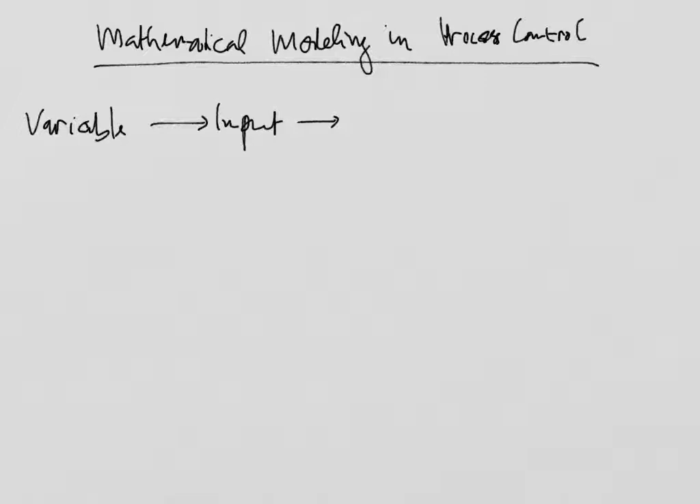Before we discuss about mathematical modeling, we review what we have studied about the variable. We have the classification of variable: input variable and output variable. In input variable, we have two types of input variable, that's the load variable and the manipulated variable. It is our input variable here.

And then in output variable we have measured variable and unmeasured variable. Okay, we have studied this in our lecture before, and then I will illustrate you another classification of variable, or another variable that we call the state variable.

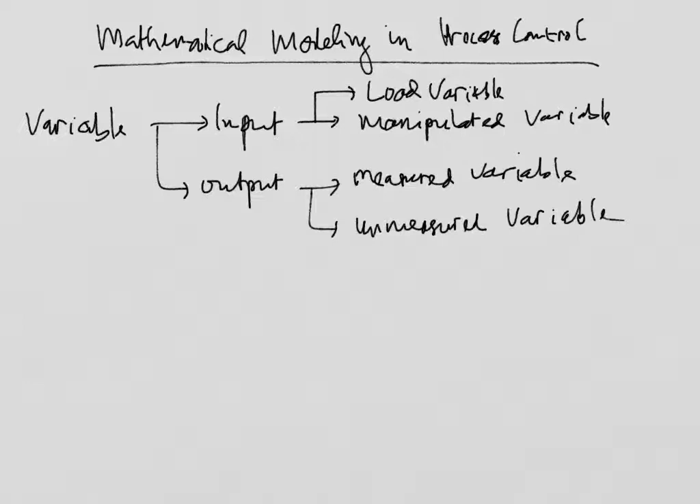What is the state variable? How do we know about the state variable? The variable that we can state or we can measure is temperature, pressure, composition, and then the flow rate, maybe.

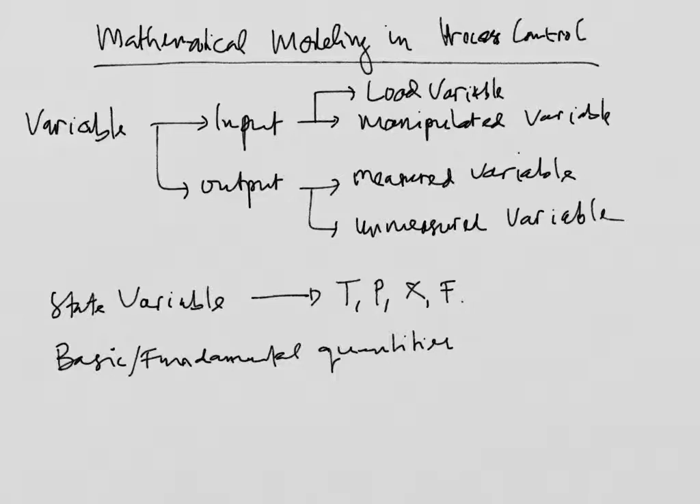In this time, we have the basic or fundamental quantities. What is the basic or fundamental quantities in chemical engineering? Do you know about the mass and the energy and the momentum? That is the basic or fundamental quantities.

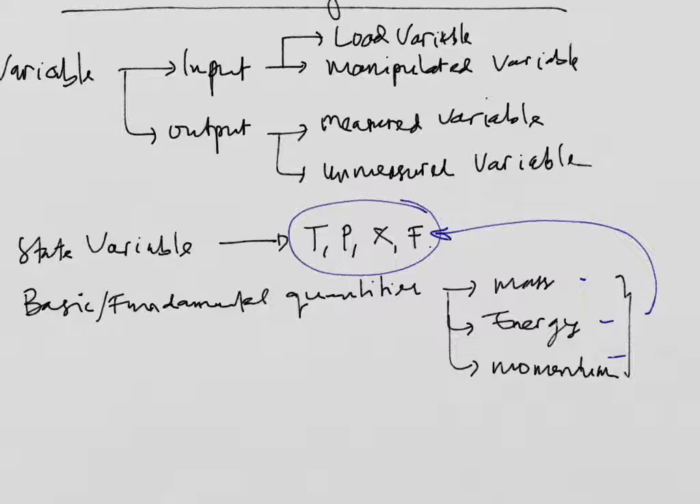But unfortunately, these quantities we cannot measure directly. We cannot measure mass, energy, and momentum directly, but we can measure temperature, pressure, composition, and the flow rate. That is the state variable. In the process, we have the state variable to state the process, the condition of the process, to show the condition of the process. Okay, that is the state variable.

Okay, we know here that the state variable, that is T (temperature), pressure, X, and flow rate, it can form the differential term or the accumulation term. It can be in accumulation term. That is the state variable.

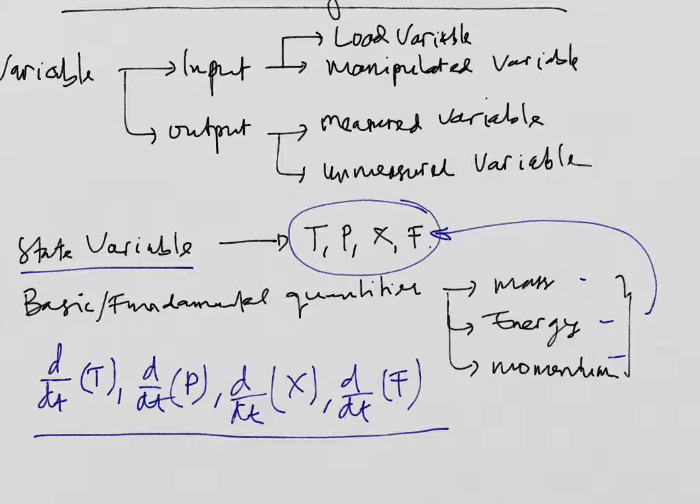Beside the state variable, we have the state equation. We build this state equation using the conservation law. It can be conservation of mass, conservation of energy, and then conservation of momentum.

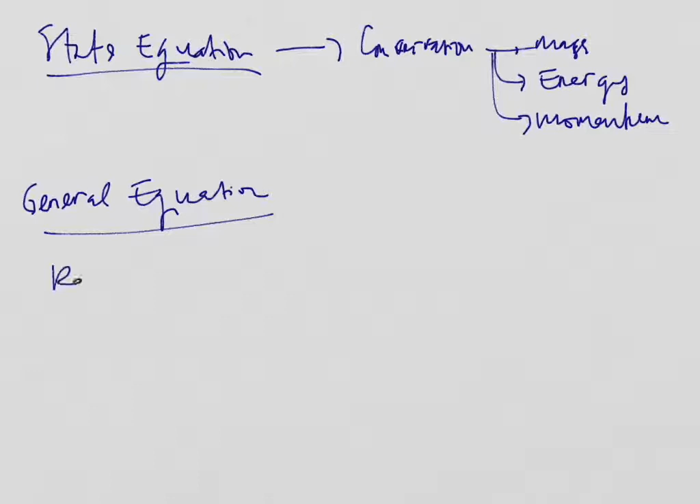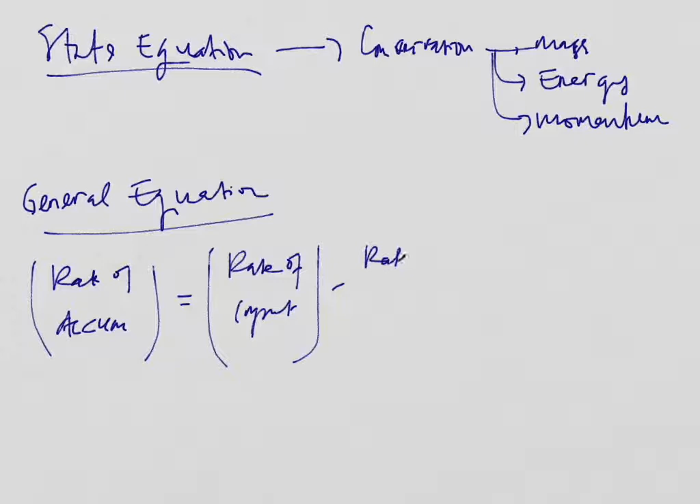And now we start modeling. We come from the general equation. The general equation is: rate of accumulation equal to rate of input. That is the general formula. Rate of output plus rate of generation.

Okay. We apply this equation to the three conservation laws here: rate of accumulation of mass, rate of input of mass, rate of output of mass, and rate of generation of mass. Rate of input, rate of accumulation of energy, and then similar for energy and momentum. Okay, that is the formula.

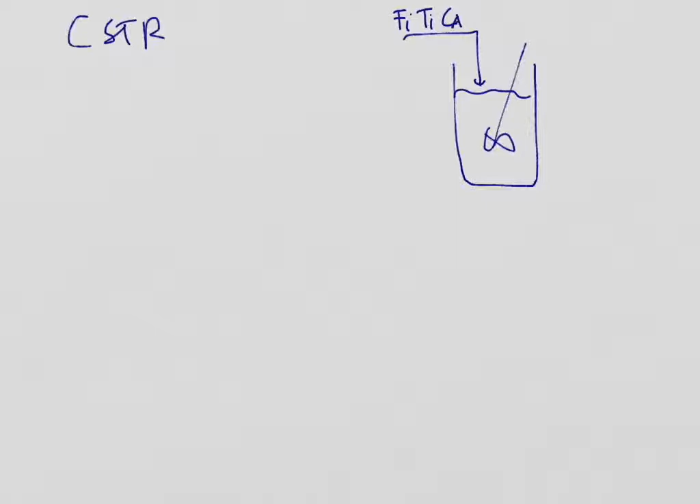And then we start using an example of the CSTR. Do you know CSTR? Continuous stirred tank reactor. We have the reactor here, that is the tank. Then start, and this is the input. We have the flow rate of input Fi, and then Ti, and then Cai. That is the input.

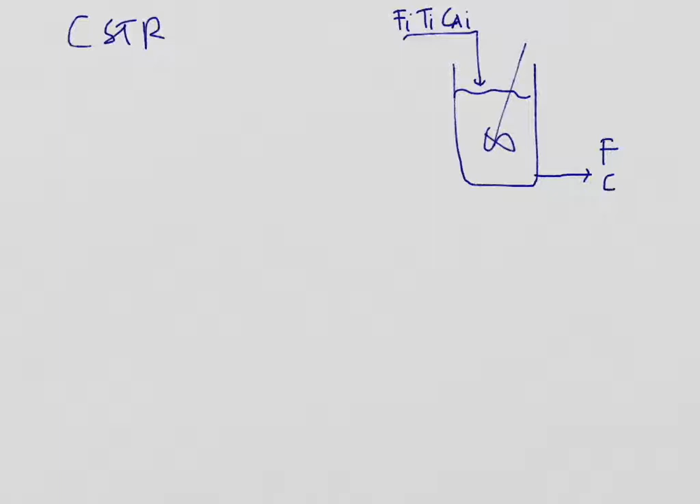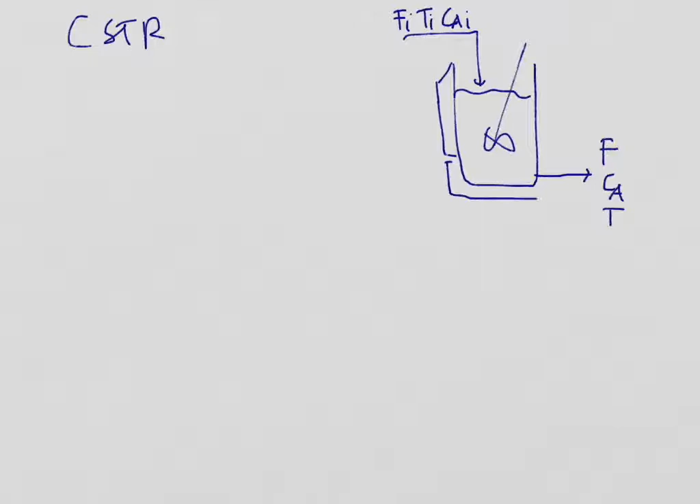And then we have the output here. The flow rate is F, and the composition is Ca, and the temperature is T. And then we have the jacket here for the coolant, like this. This is the coolant in, F coolant, temperature coolant in, and then the coolant out, the temperature of coolant out is Tco.

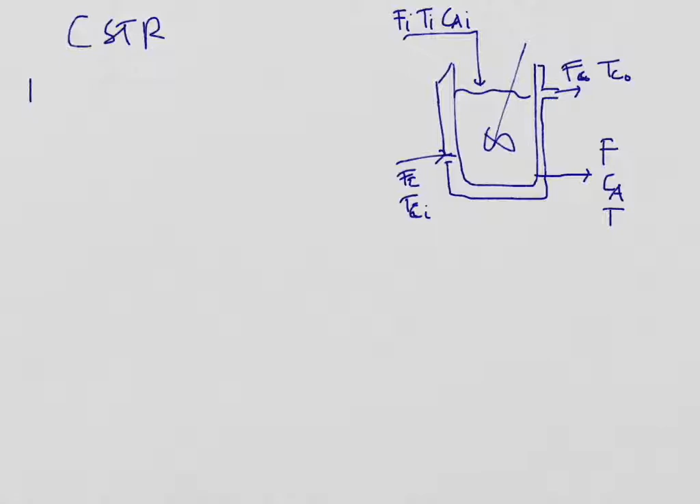Okay, you have here that is our system. And then we start to identify the unit of the system. We have F, and then Fi, and then F coolant. The unit of this quantity is volumetric per unit time, volumetric per unit time, volumetric per unit time. And we have the concentration Ca and Ca input. The unit of this quantity is mole per volume. Okay.

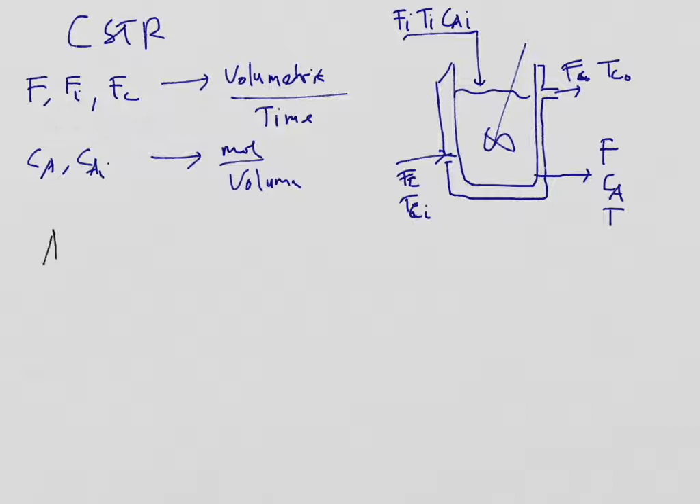And then we make an assumption. We have an assumption here. Firstly, our assumption is mixing, perfect mixing.

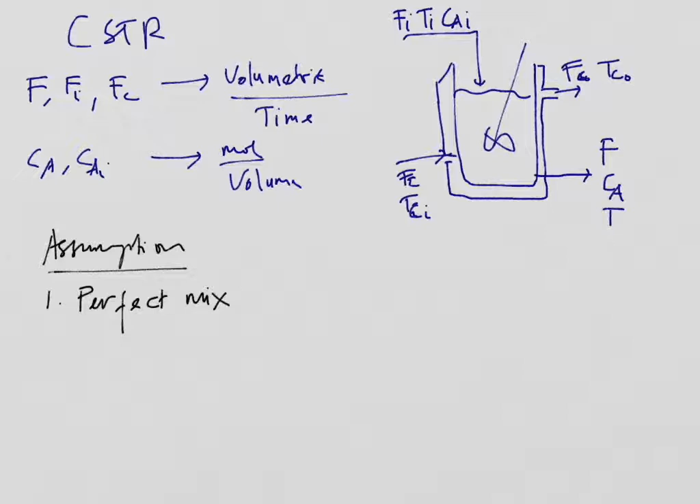What is the implementation of this assumption? Because we have this assumption, the temperature in the reactor is exactly the same as the temperature output from the reactor. So the temperature in the reactor is T, and the concentration in the reactor is Ca.

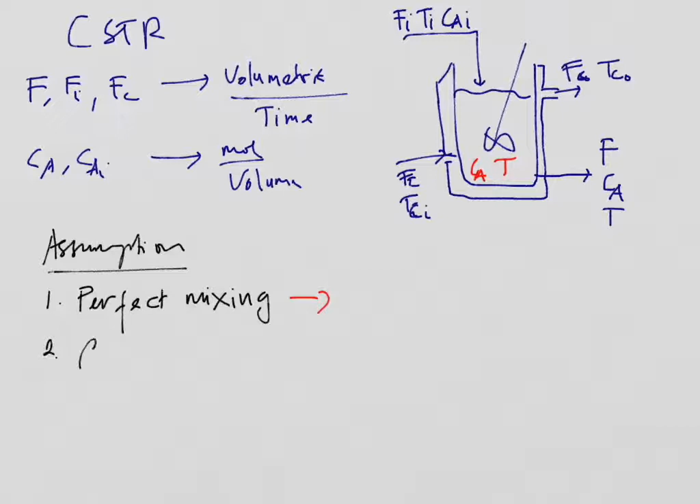Because we assume that the mixing is perfect, okay? We have another assumption, that the rho and the Cp are constant. We assume the rho and Cp are not a function of temperature. This is constant.

And we have another assumption too, that the reaction of A into P is a first order reaction, and exothermic. Okay, that is our assumption.

And we add the assumption again that the insulation is perfect. So there is no heat loss. We assume there is no heat loss. Okay, that is our assumption for this system.

Okay, then we start the analysis. We start from overall mass balance.

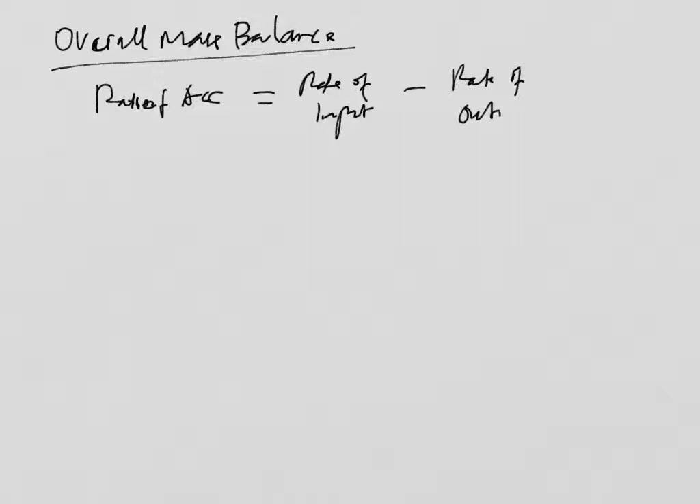We have here the rate of accumulation equal to rate of input minus rate of output. Okay, there is no generation in mass, because of the conservation of mass, there is no generation. Mass cannot be generated and cannot disappear.

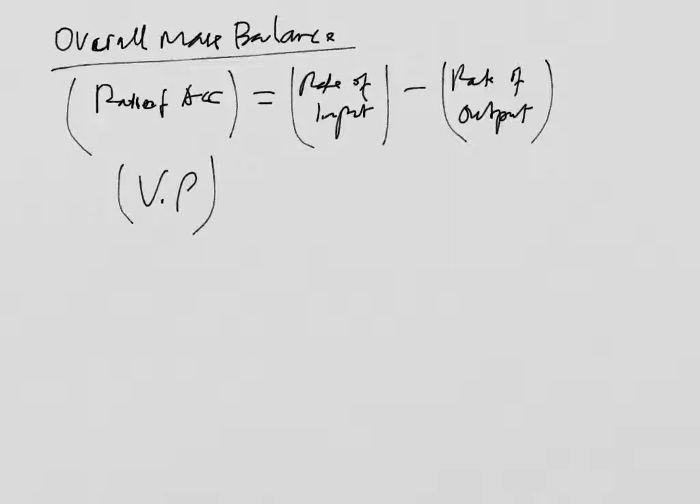So we have here the representation of mass, volume multiplied by rho, that is the mass, and the accumulation is the term of d/dt, that's equal to Fi, the input, multiplied by rho, and then F multiplied by rho. You can see this, that is the input, that is the output.

Because rho is constant, we can construct rho dV/dt equal to Fi rho minus F rho. And we can remove the rho, so we have the final equation dV/dt equal to Fi minus F. That is our first equation. From overall mass balance, we get dV/dt equal to Fi minus F.

Okay, and then we continue to the component mass balance. In component mass balance, for component A, for the mass balance of component A, here.

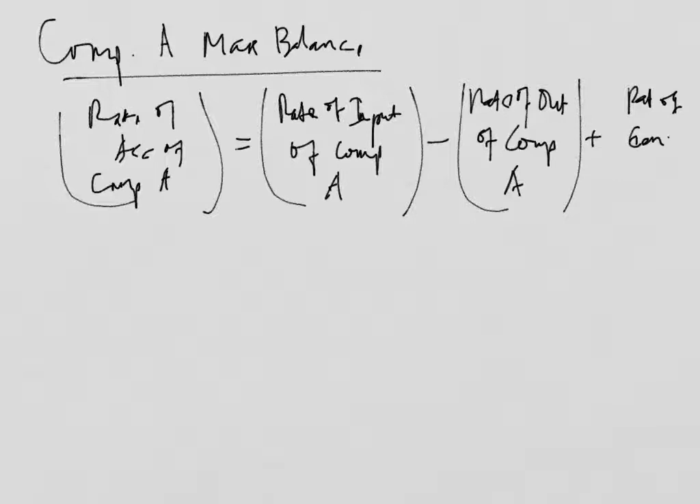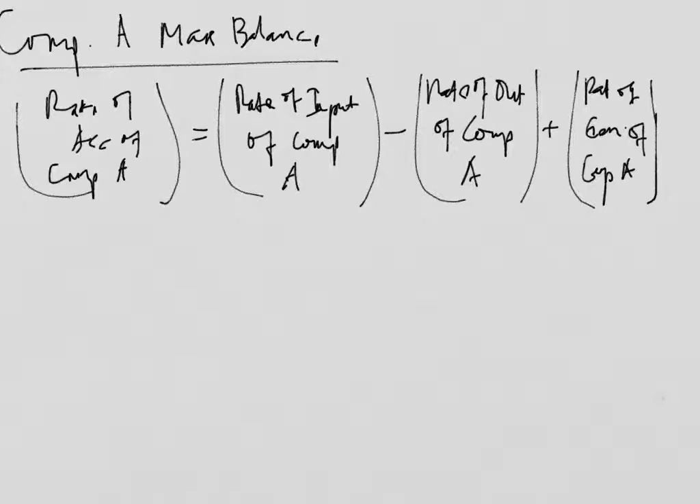We use the same formula: rate of accumulation of component A equal to rate of input of component A minus rate of output of component A plus rate of generation of component A. In terms of the component, we have generation and loss because the mass of the component is converted into another component, but not disappearing or being generated.

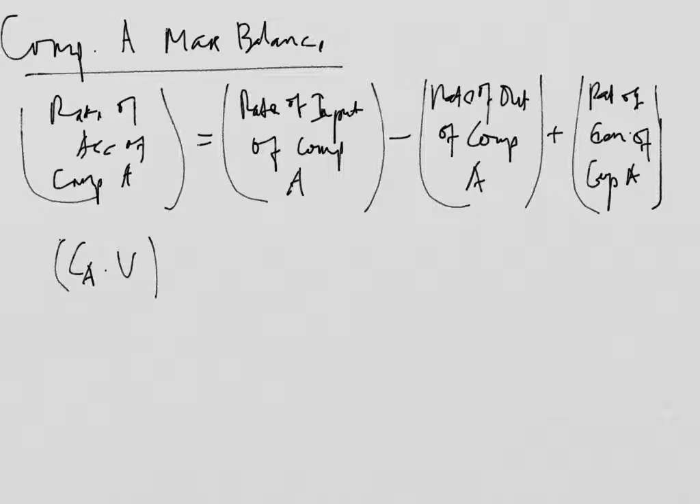Okay, in accumulation, we have the concentration Ca multiplied by the volume of the reactor here. The accumulation is the concentration in the reactor multiplied by the volume of the reactor. That is the mass, the accumulation V dCa/dt equal to the input Fi multiplied by Ca input, and the output is F multiplied by Ca, and the generation is the reaction, minus Ra multiplied by the volume of the reactor.

Focus on this formula. Ca and V change over time, so there is no constant here. So from this formula we can use the fundamental mathematical equation, Ca dV/dt plus V dCa/dt equal to...

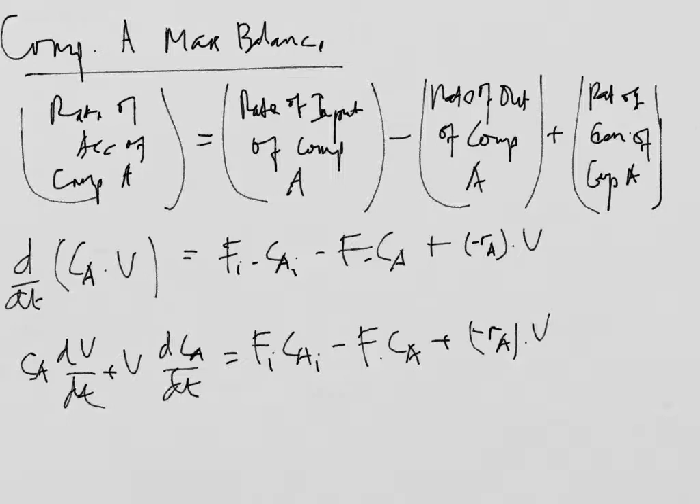Fi Cai minus F Ca plus minus Ra multiplied by V, the volume of the reactor. And you can see this dV/dt, and we have the formula for dV/dt in equation 1. So we can substitute this formula using equation 1.

So we have Ca multiplied by (Fi minus F), that is formula 1, plus V dCa/dt, equal to Fi Cai minus F Ca plus minus Ra multiplied by V, the volume of the reactor. Here we have Fi Ca minus F Ca plus V dCa/dt equal to Fi Cai minus F Ca plus minus Ra, and then the volume of the reactor.

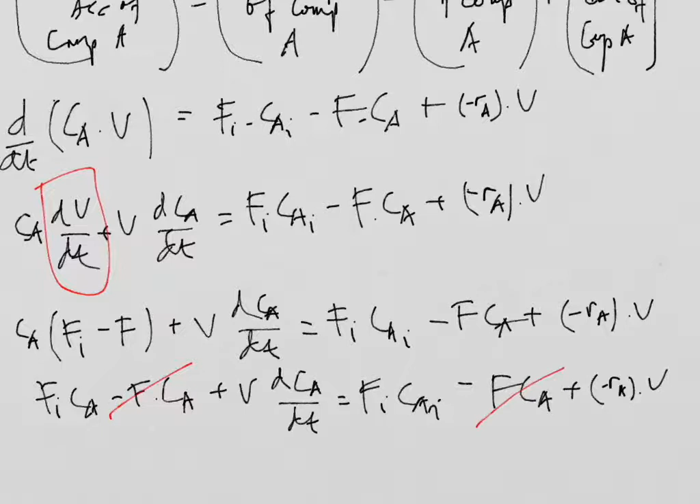We have here that F Ca, we can remove the F Ca, and then we can reorganize our formula so that V dCa/dt equal to Fi Cai minus Fi Ca plus minus Ra, the formula, multiplied by V, the volume of the reactor, and then we can reorganize again.

dCa/dt equal to Fi divided by V multiplied by (Cai minus Ca) plus minus Ra. Okay, we divide here using V. That is the second equation, the equation for dCa/dt, the second equation. Okay, clear enough?

That's good. We continue to the...

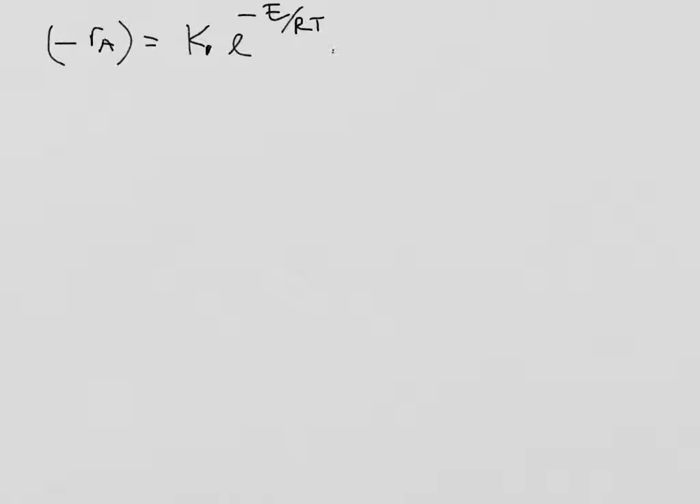We have here the CA, we have the equation of CA. The equation of CA, we can use the Arrhenius equation, that minus RA equals K0 multiplied by exponent minus activation energy, divided by R and T, and then multiplied by the concentration, I think. That is the 2.A equation, you can say this. Okay, that is the addition equation for equation 2.

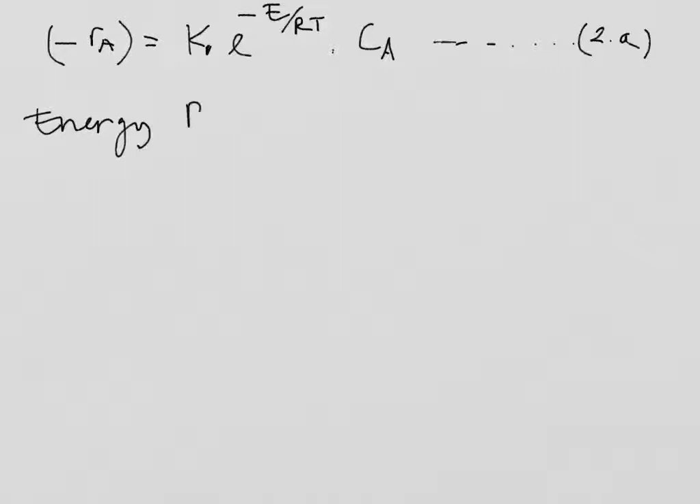Okay, and then we continue to energy balance. The energy balance. We use the same formula.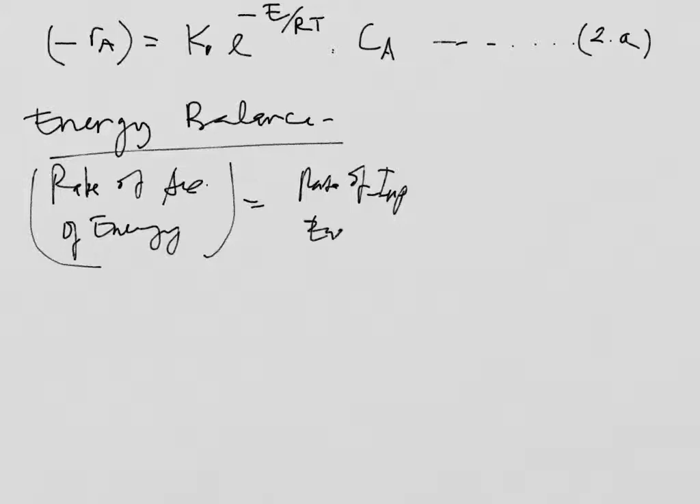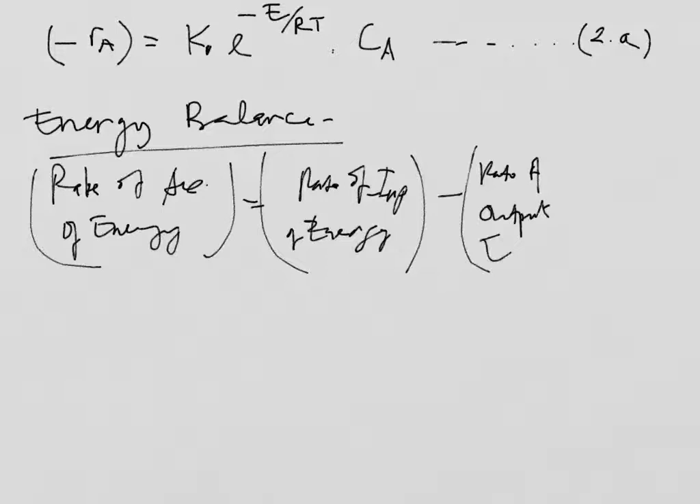The rate of accumulation of energy equal to rate of input energy minus rate of output energy, and then minus the energy or heat that is removed by the coolant, heat or energy. We call this energy or heat removed by coolant, and then plus the energy that is generated by the reaction, from exothermic reaction. Okay, that is the formula of energy balance.

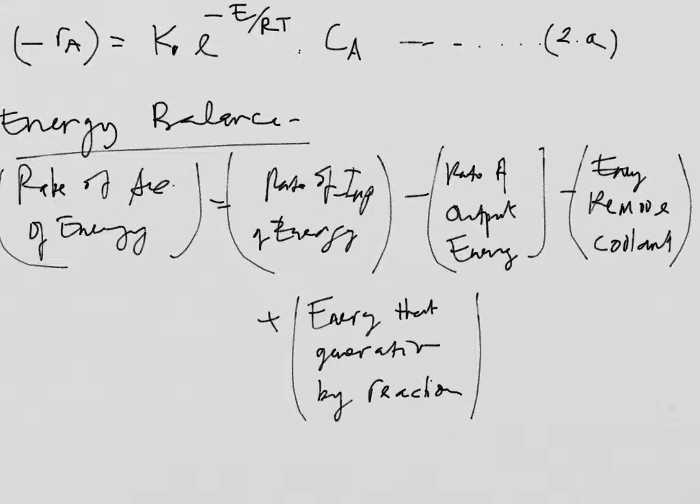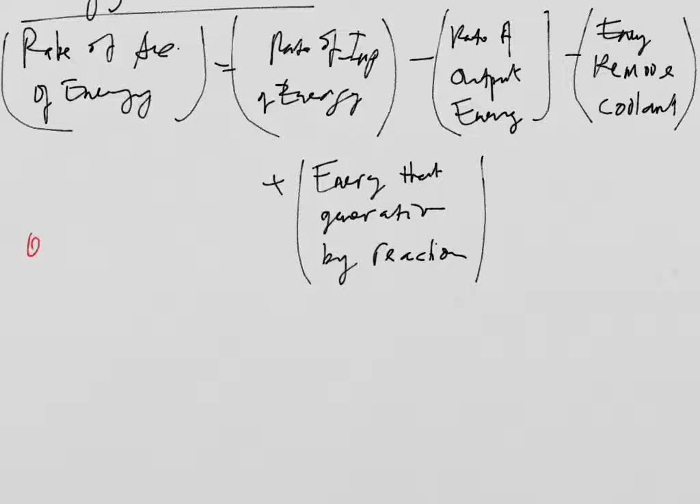And then from this we explain part into part. Rate of accumulation, we have the rate of accumulation. Okay, that is our formula. The energy or the heat is mCpT. We have this, so M is rho multiplied by volume. We can say that in the reactor we have the volume, so we multiply by rho, and then we calculate and multiply by Cp, and then the temperature in the reactor.

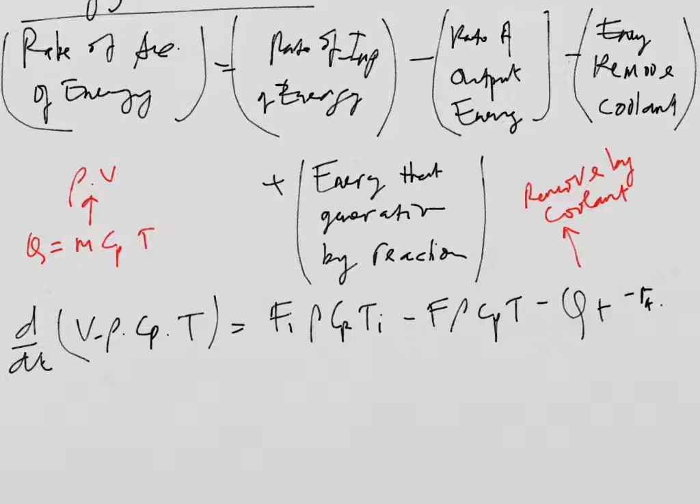That is the heat energy of the fluid from the fluid in the reactor. So the accumulation term here equals Fi rho Cp Ti minus F rho Cp T minus the Q, that is the energy removed by coolant, and then plus minus RA multiplied by delta H, and then multiplied by the volume of the reactor. Okay, that is our formula here.

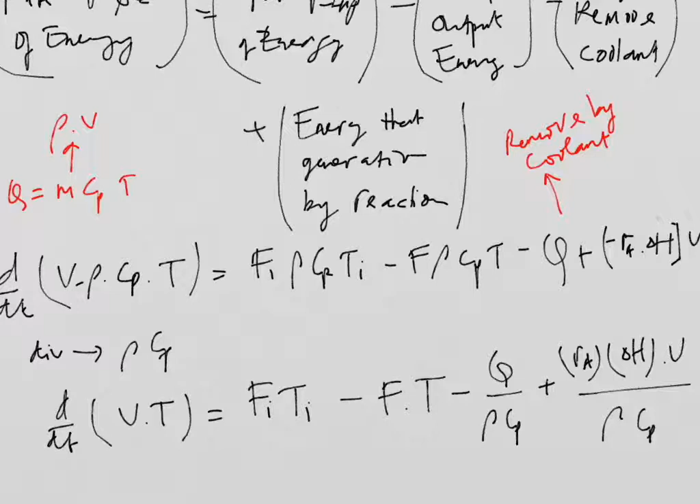We can simplify this formula by division by rho Cp. So we have d/dt of V*T equal to Fi multiplied by Ti minus F multiplied by T, minus Q divided by rho Cp, and then plus RA and delta H and volume, then divided by rho Cp. Okay, we divide this formula using rho Cp.

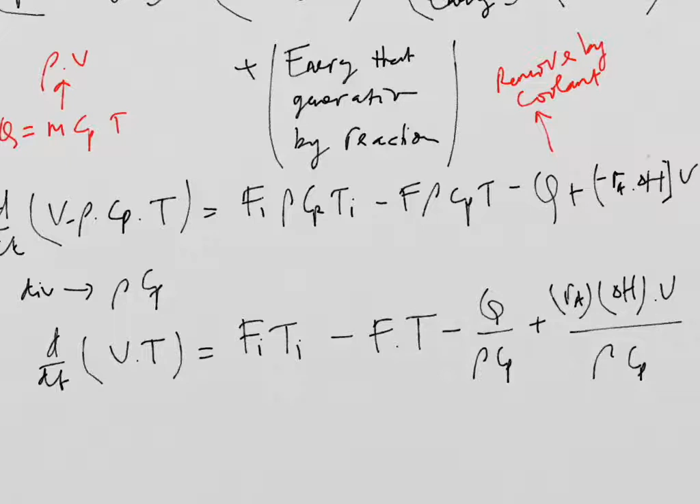We know this, the V and the temperature are functions of time, so we can explain here that V dT/dt plus T dV/dt, that equals Fi Ti minus F T minus Q per rho Cp, then plus RA delta H, volume, and rho Cp. Okay, that is our formula.

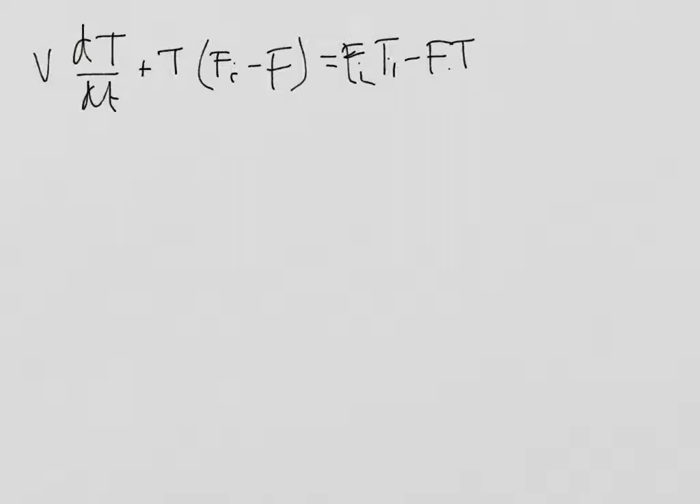And then you know this, the dV/dt from equation 1, we can replace this by Fi minus F. So we have the formula here that V dT/dt plus T(Fi minus F) equal to Fi Ti minus F T minus Q per rho Cp plus RA delta H on volume, and then rho Cp.

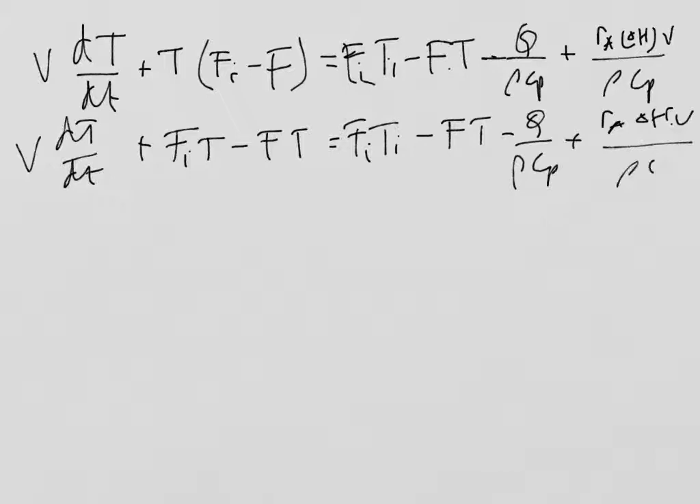Okay, you can see this, that we have Fi T minus F T equal to V dT/dt equals Fi Ti minus F T minus Q per rho Cp, and then plus RA delta H and volume, but the rho Cp. We can remove this formula and reorganize into the right side, and then we get the new formula of V dT/dt equal to Fi Ti minus F T minus Fi T, and then minus Q per rho Cp, and then plus RA delta H, and then the volume, and then rho Cp.

Okay, and we can divide by V. So we get dT/dt equal to Fi per V, Ti minus T, and then minus Q per rho Cp V, then plus RA delta H, and then the volume per rho Cp V. So we can remove the V here.

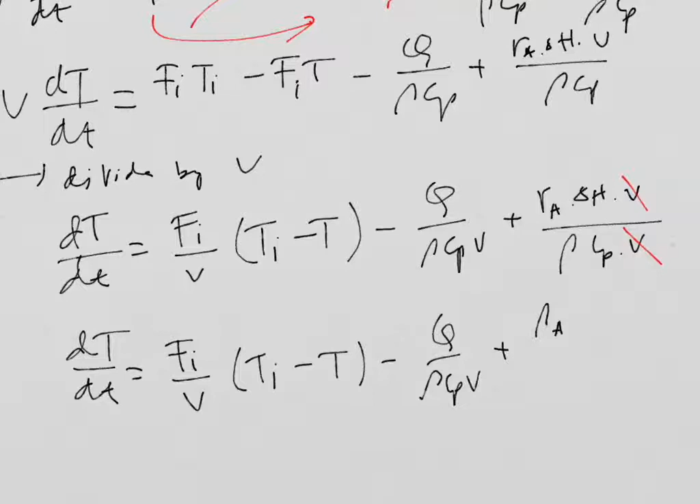So we got the final formula, that is dT, the differential of temperature, is Fi per V, Ti minus T, minus Q per rho Cp V, then plus RA, the reaction, and then delta H, and then rho Cp. Okay, that is formula 3. We got this, formula 3 here.

Okay, so we have dV/dt, dCA/dt, and dT/dt. Formula 1 is dV/dt, and then dCA/dt, and then dT/dt. Okay, we got this.

Do you know about the Q? Q is equal to, this is the addition equation, Q is F coolant multiplied by rho, and then Cp, and then multiplied by the temperature coolant output minus temperature coolant input, or delta T.

That is the Q removed by coolant. So this is formula 5. You can see this, formula 5. Okay, we resume our formula.

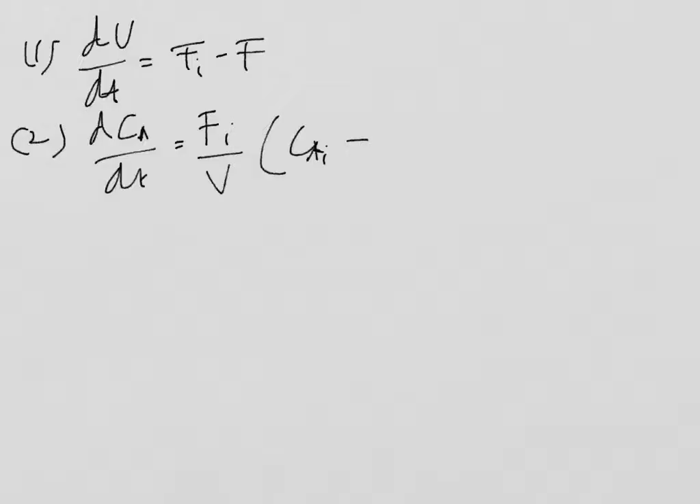Firstly we have dV/dt equal to Fi minus F. Then the second, we get dCA/dt equal to Fi per V, Ca i minus Ca output, plus reaction, plus or minus Ra on the reaction.

And then formula 3 is the differential of the temperature. The differential of temperature is Fi per V, Ti minus T, minus Q per rho Cp V, plus Ra reaction, and then delta H of the reaction, and then rho Cp.

And the additional formula, number 4, is that Ra is Ko, Ca, and exponential minus E over RT.

And then formula 5, the Q is equal to F coolant multiplied by rho multiplied by Cp of the coolant, multiplied by the temperature difference of the coolant output minus the coolant input. So we got this formula 5.

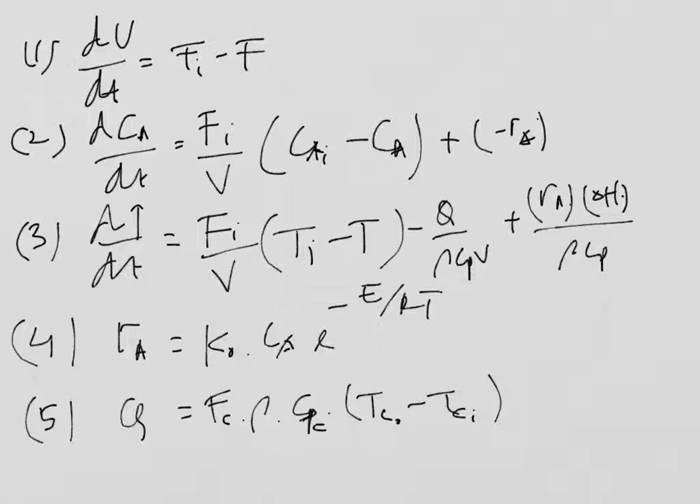And we want to identify the variables. What is the input variable? Where is the input? We get Ci, Cai, and Ti, and Fi.

And then what is the Q? We can see the Q, but we don't detail the Q, so we just call this Q as a formula. And then the F can be output variable or input variable when we use it as the manipulated variable, as we have discussed in our lecture before.

So we have the output here. What is the output that we have? The output variable is the volume of the liquid in the reactor, the Ca, and the temperature output of the reactor.

We identified the control variable and the manipulated variable. What is the control variable? It must be the output variable. It can be the volume and the temperature. Volume of the liquid in the reactor - what parameter refers to this variable? Volume refers to Fi or F.

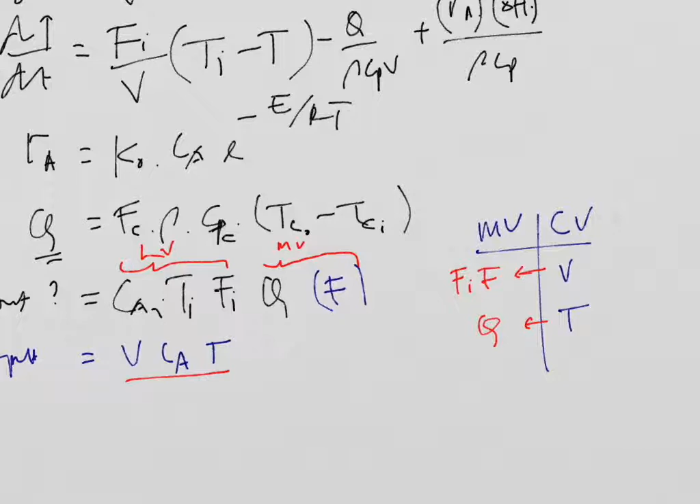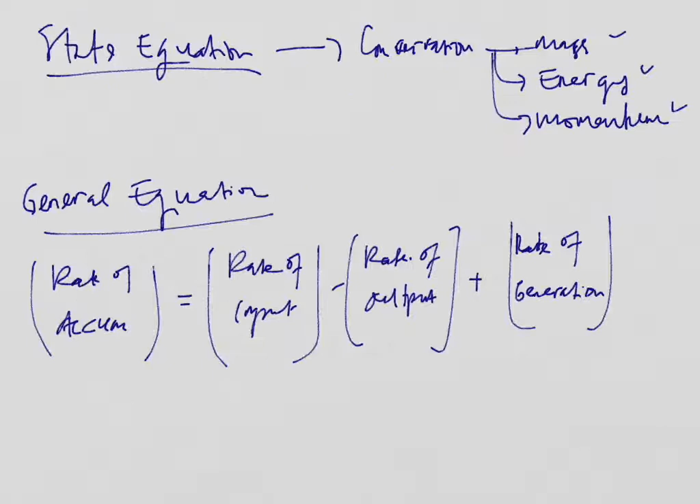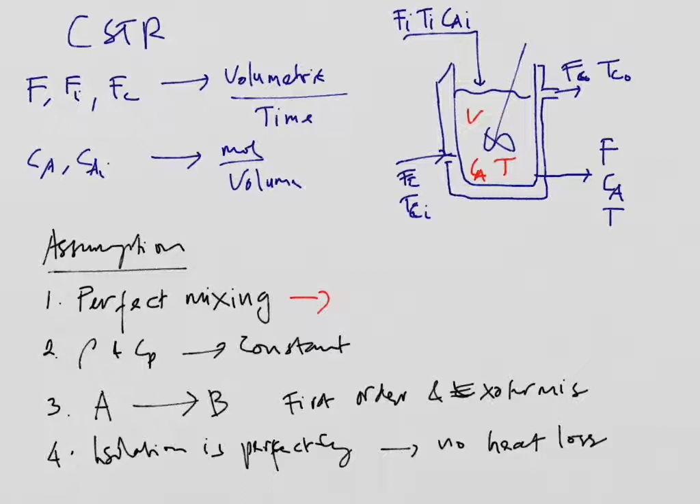That is the illustration of mathematical modeling in process control that we have studied here. You notice we have a sample of a continuous stirred tank reactor using coolant as the cooling agent, and that is our assumption, and finally we got 5 equations here.

The dV/dt equal to Fi minus F, and the dCA/dt equal to Fi divided by V, Cai minus Ca, plus Ra. Then dT/dt, the temperature differential by time, equal to Fi divided by V, the temperature input minus temperature output, minus Q, the heat removed by coolant.

As addition, we have the reaction formula by Arrhenius, and we have Q by the mass of the coolant multiplied by the temperature difference of the coolant.